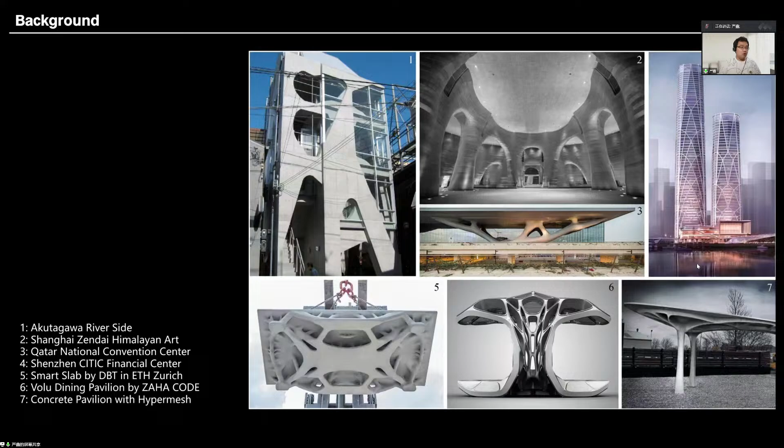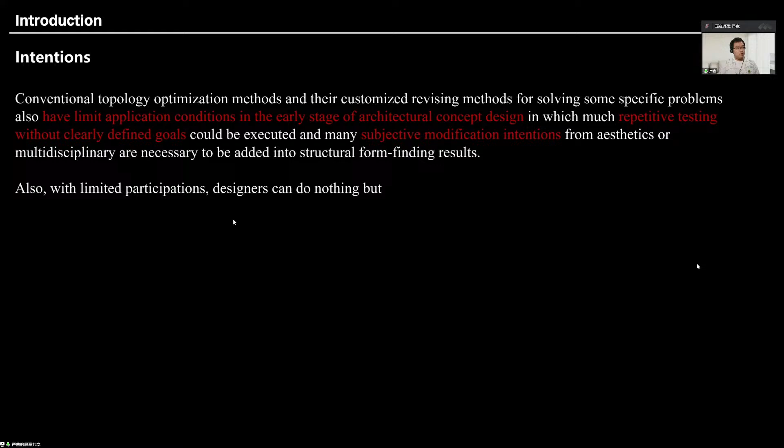But conventional topology optimization has its own problems. It has limited application conditions in the early stage of architecture concept design, because as designers, when we design our own work, we need to compare our own design objectives with structural preference. This is very important for us, because if we just depend on the computer, and the computer tells us which one is good and which one is bad, that's not work of us. But when we use conventional topology optimization, we usually do something like this.

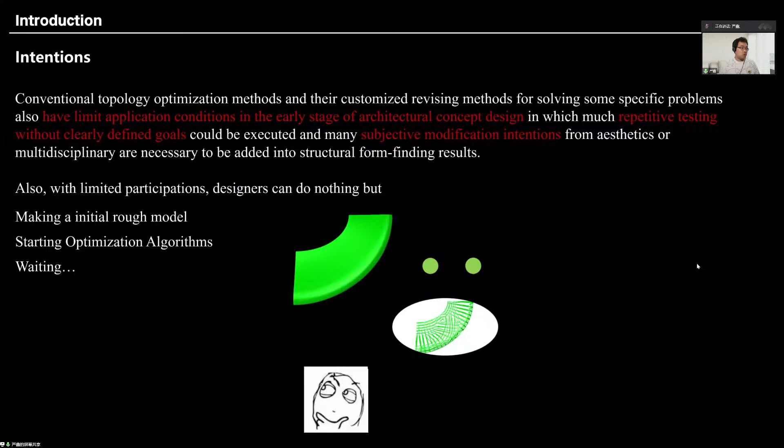First we make an initial model like the green one, and we can imagine what the outcome will be, what the final result will be. We want the final result to look like this one, some standard structural components with very small holes over the whole design domain. Then we start the optimization algorithm, and we have nothing to do but wait and wait. Finally the algorithm finishes its optimization, and we want to get a very good design, but the outcome is like this. We can see the final result the computer gives us is, it's hard to say, with the highest structural performance, but it's not what we want.

So the question is, can we pre-design the details before optimization, and how do we control the design features with topology optimization? This is the intention of my work. To achieve these goals, first I construct a framework, a BESO framework oriented to architecture design.

In the conventional BESO logic, we just write Python code and run it in the Python environment, with nothing to choose. In my work, I divided the whole logic into several parts.

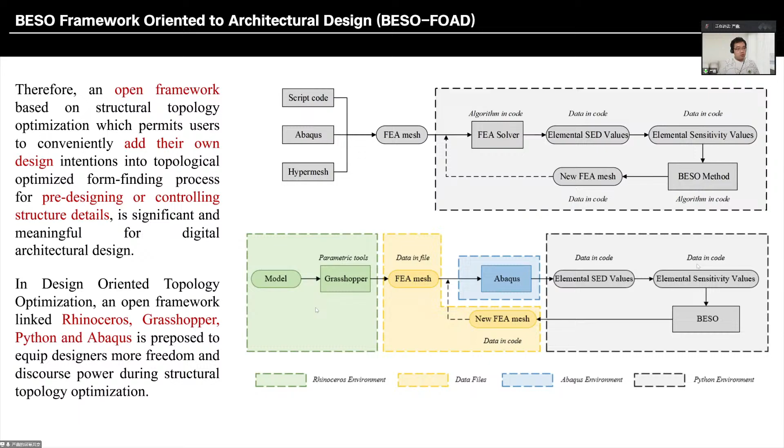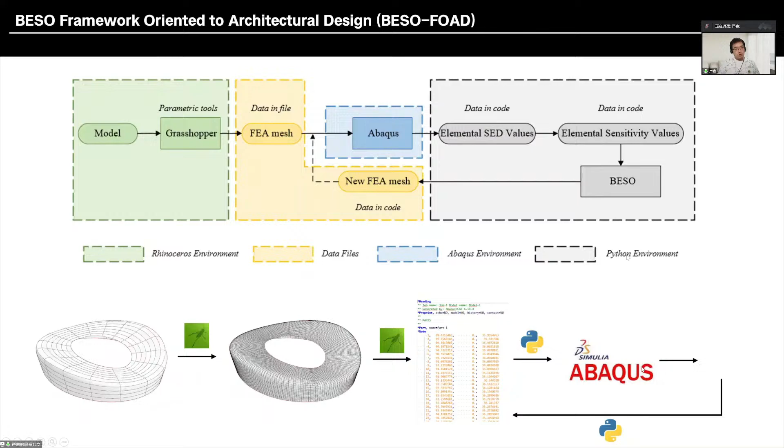With this framework, we can easily generate a very beautiful initial design domain with a free-form surface or with very complex forms. Then we can use Grasshopper to generate its calculation network, and we can get all the information about the FEA elements we need, then transfer that information into the TSC files and transfer the values into the BESO loop.

So with this framework, we designed and fabricated some installations like XForm 1 with Dr. Nic Bao and Professor Mike Xie, and XForm 2 in 2019 at the Barcelona exhibition, also with Dr. Nic Bao and Professor Mike Xie.

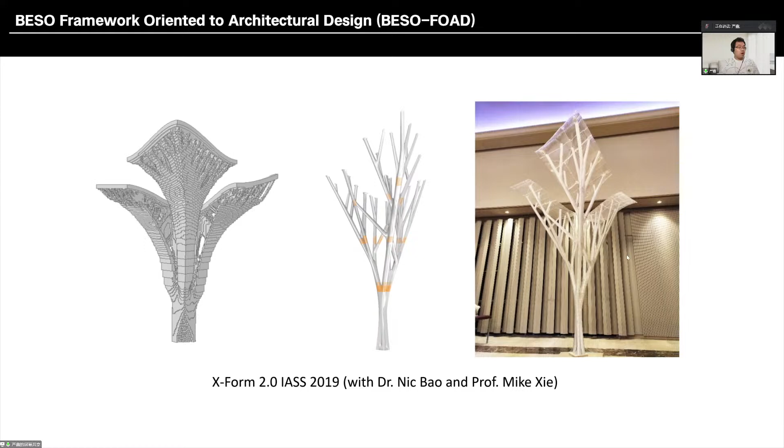And we also do some computation, which means structural computation, to generate the highest structural performance result. So this is the basic logic of the framework, but this also does not fit our goal about the pre-designed form details.

So I changed the framework with the right part, which is artificial coefficient files. This one just contains some parameters, and with this kind of parameters, we can change the basic BESO logic and add our design goals, our design preference, to the structural optimization.

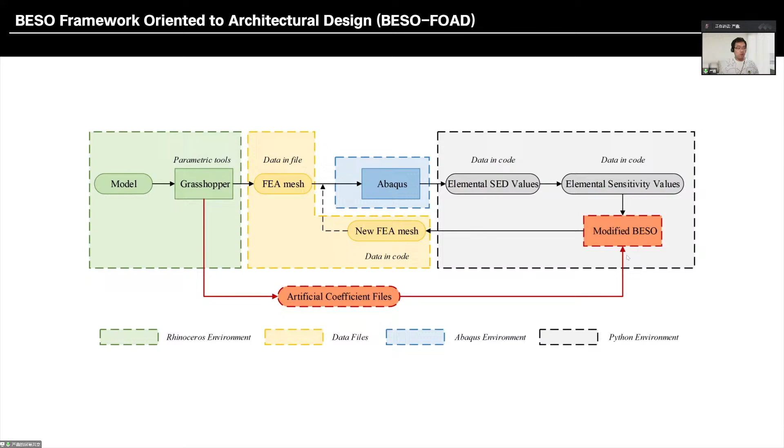So there are 6 new algorithms I developed in the past 2 years, and the first one is the original BESO logic. You can see the right part is the artificial coefficient files I made.

In this algorithm, I add some parameters into the topological optimization algorithm, and then integrate our design concepts with the structural calculation and mix them together to get another design, which at some level can fit our design goals.

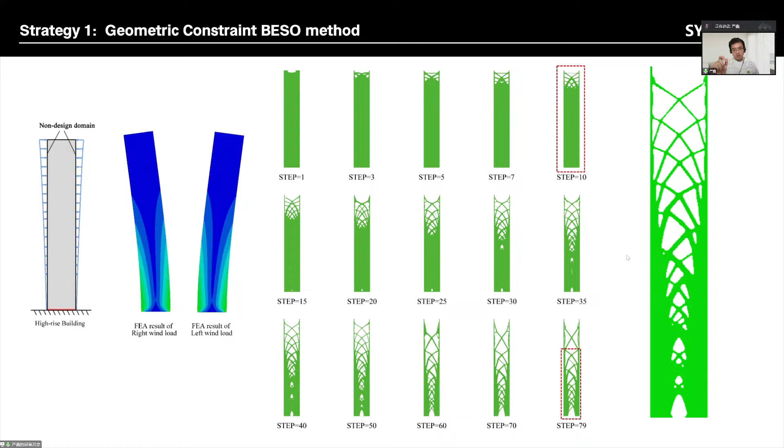So why do we get asymmetrical parts? The reason is one, because of calculation errors in the computer, and most importantly, when we reduce the materials, which means when we remove elements, the elements in symmetrical positions are not reduced at the same time. So when one element is reduced and the other one is still here, from that point the following results go asymmetrical.

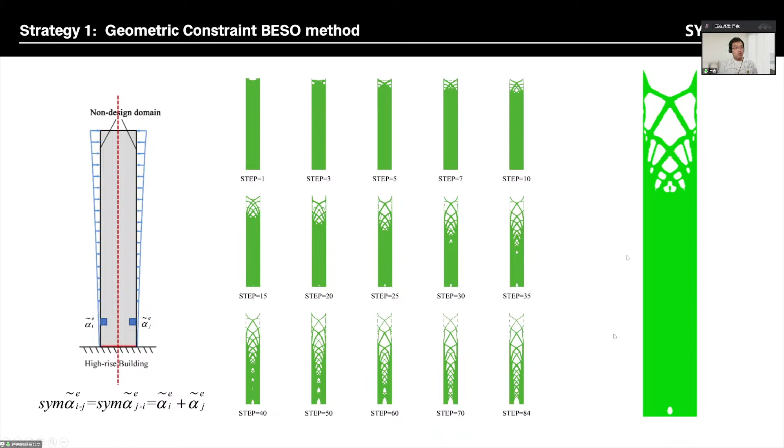So I made a SYM-BESO, which is a symmetrical modified BESO method. In this method, I couple the symmetrical elements and add their mechanical values together to generate a new value, which means a sensitivity number. Then based on the new sensitivity number, I can remove the symmetrical elements together. So in each step, we can get a symmetrical result. You can see with this algorithm, we can always generate the symmetrical result.

And the second one is with similar logic. When we optimize the periodic structure with the conventional BESO method, it's hard for us to generate a very regular outcome because there are so many elements in the periodic parts. So we need to calculate all the element values together and then remove them or preserve them at the same time. So with the CYC-BESO method, we can generate our results with periodic features.

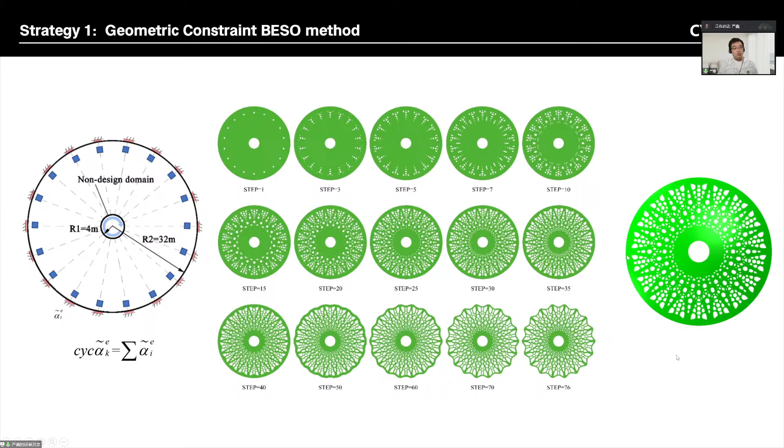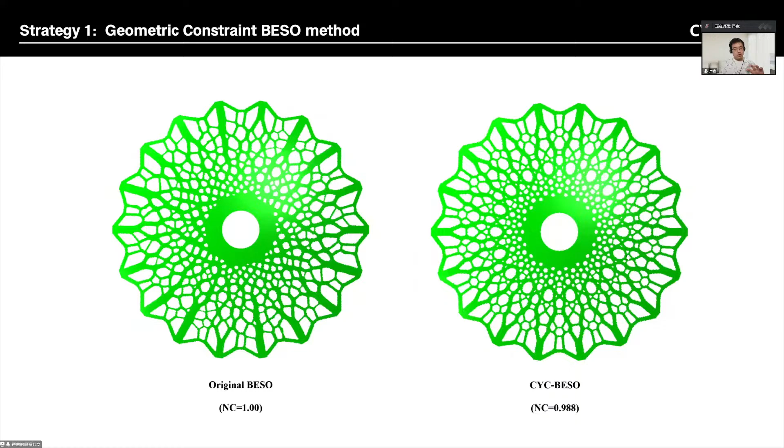So you can compare the outcomes. This one is generated by the original BESO, so you can see there are some non-periodic parts here. Then with the CYC-BESO, we can add the periodic constraint to the algorithm and generate a form with periodic features.

So in the middle of the evolutionary process, we can generate some small parts which have no supports around them. So in the next calculation, this small part will just fall down without any support. If this happens, all the FEA calculation will stop because there is a very big displacement.

So to solve this problem, we just need to remove the isolated part before the calculation starts. But the question is how we can find the small parts without any supports in the optimization algorithm. So we use the depth first search method to search for the isolated part. With the DFS method, we can select which one is the small part without any supports and remove them first, then transfer the remaining structure to the next calculation.

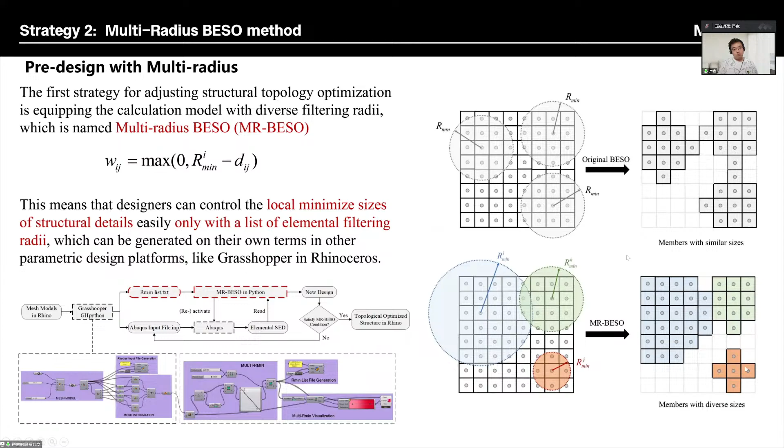But if we can encrypt different elements with different RMIN values, we can pre-design the local size in the final result, like the diagram here. So if this element is encrypted with a bigger RMIN value, and the right one is with a small RMIN value, then with the MR-BESO method we can generate a final structure with very huge blue parts and very small red parts. So with this kind of method, we can use the RMIN value to pre-design the final features in the optimized result.

So back to the 2D cantilever algorithm, if we add different RMIN values from 10.5 millimeters on the left part to 1.5 millimeters on the right part, we can generate a final result like this one. You can see with the very big RMIN value on the left, we can generate very huge structural components here, and with the small RMIN value on the right, we can generate some slender parts.

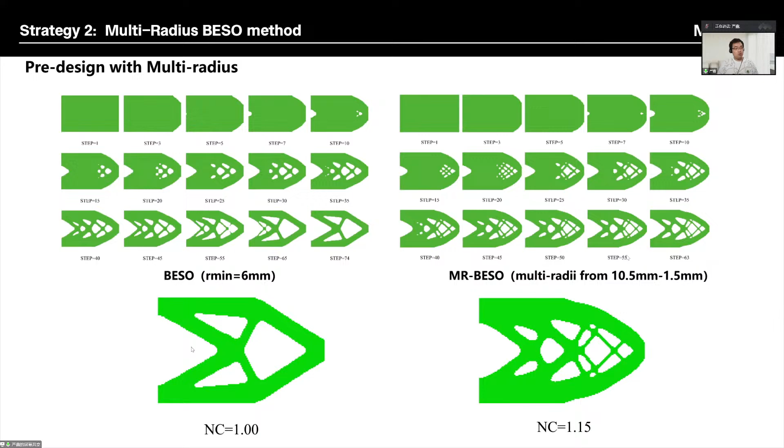This is generated by the original BESO method, so you can see the difference. Also, the high-rise building example can be generated like this one.

With the MR BSO method, we can set the bottom RMIN value about 15 meters, and the top one with 3 meters. So you can see the structural features from the bottom to the top go from huge to small.

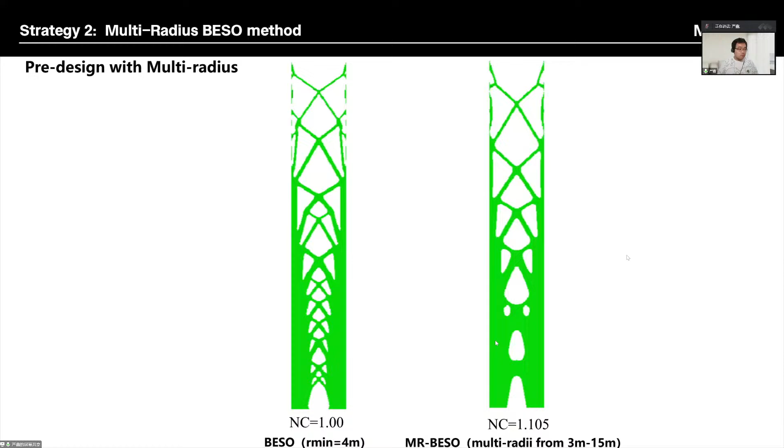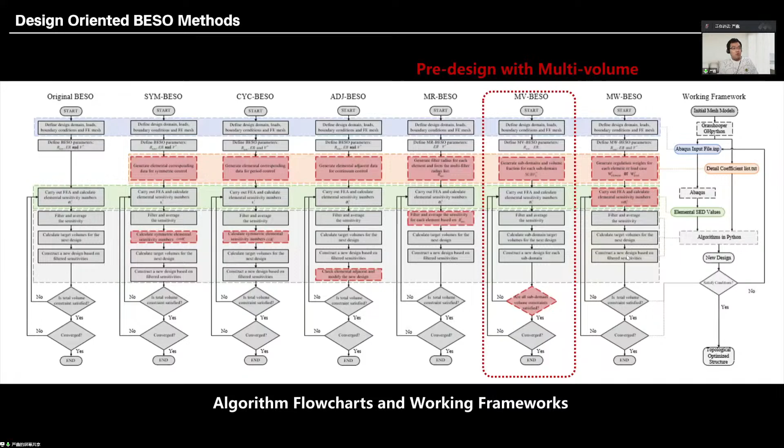And the third strategy is pre-design with multi-volume. In the original BESO method, we have only one volume fraction, which means if you set the volume fraction as 50%, it means you will remove 50% of elements away and hold half the materials in the final result.

But if you only have one volume fraction around the whole design domain, sometimes it will happen like this one. So when the original BESO method optimizes the whole design domain, some parts are totally void and some parts totally solid, because maybe the left part is more important for the structural performance, and the right part is not as important.

But for the architectural function, maybe sometimes we need some materials near the right part, and we also need to dig some holes near the left parts, like the blue one and red one. So with MV-BESO, we can add more local volume fractions into the different parts, and the algorithm can optimize at the same time, but reduce different materials in the local parts.

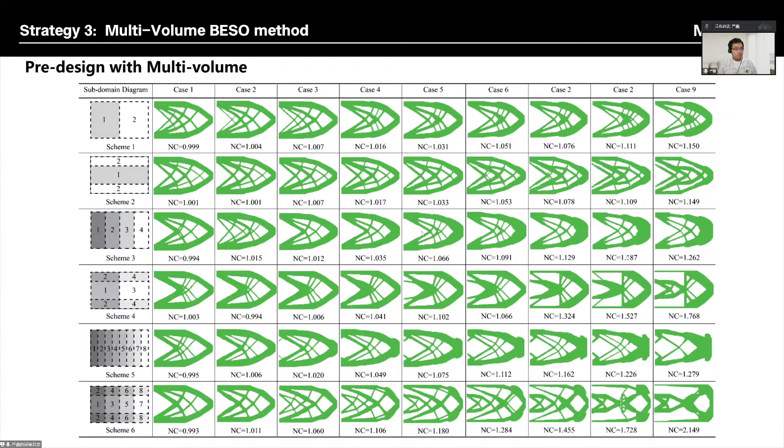We can control the local materials in the final result. This method is very important for high-rise building design, because in the original BESO method, we can only have one whole design domain, and we generate a structure with more materials at the bottom, and very small components on the top.

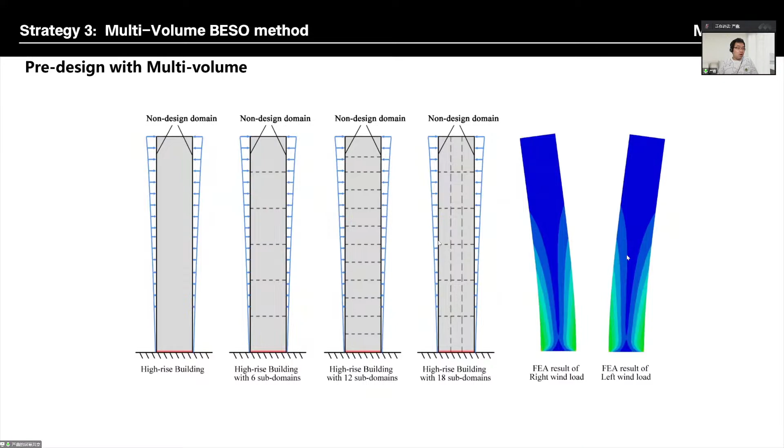So if we just divide the whole design domain into several parts, like 6 sub-design domains, or 12, or 18, we can generate different designs. With the sub-design domains, we can calculate their own volume fraction at the same time.

So we can dig some holes - this is a good example to compare the original BESO with the MV-BESO. With the original BESO, we can generate a final result like this one. But for the building design, the bottom part is very expensive for...

We must dig some holes as doors or windows to let people or light come in. But for structural performance, if you dig some holes at the bottom, it will have a very big effect on performance. So if we divide the whole design domain into 12 levels, we can make some bigger holes and add more windows at the bottom parts, while also having more structural materials on top.

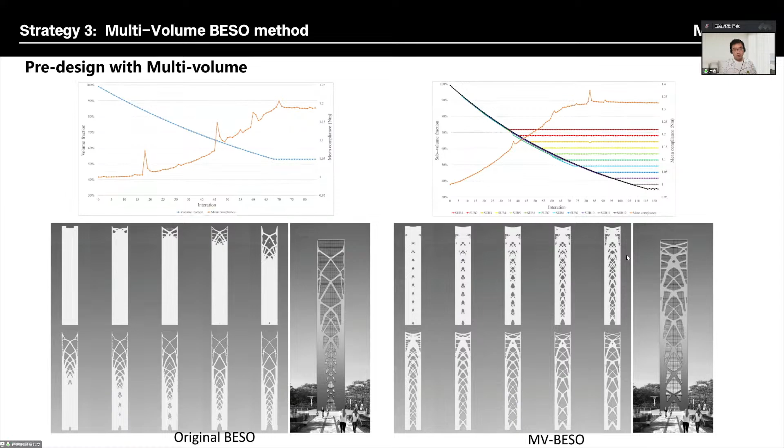That's what we want, because when we design a building, it's not only dependent on structural performance. We also need to consider other requirements - not structural requirements, but aesthetic or functional requirements.

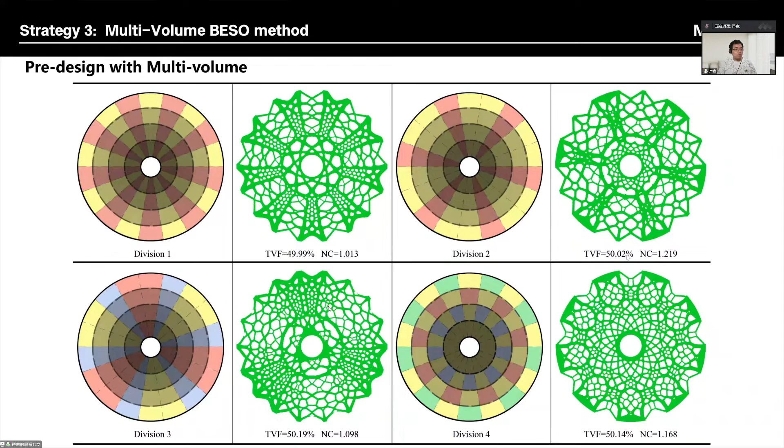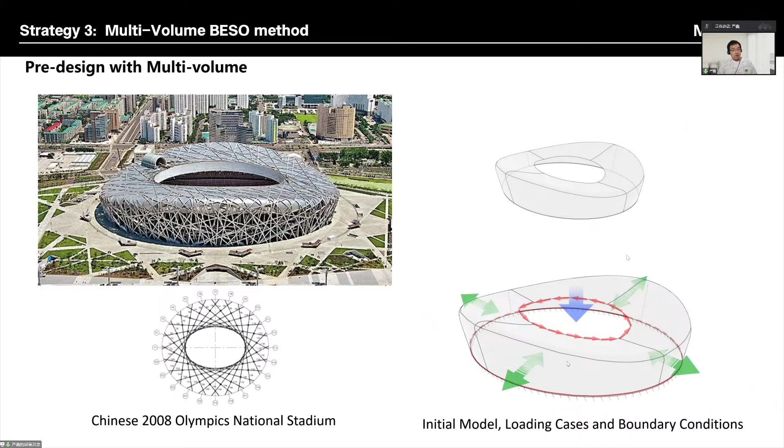This example is about the Olympic National Stadium. When we use the BESO method to generate it, the first one is the example we are familiar with - this is the original design of the bird nest, and level 2 is the design with the original BESO method.

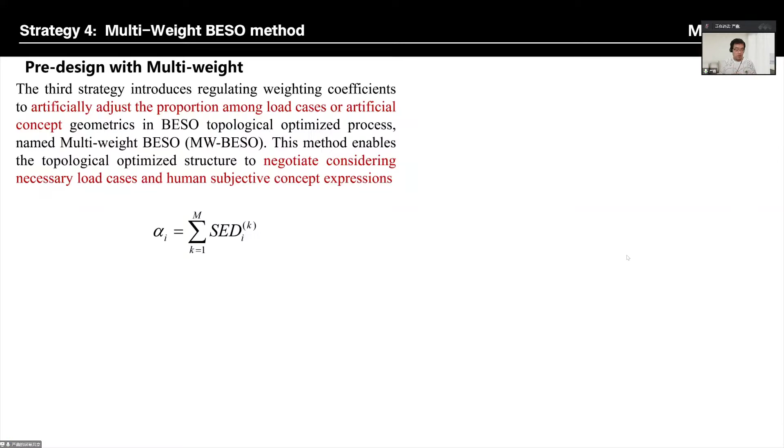In the BESO method, the very important value is the elemental mechanic value after FEA calculation. This value is the parameter for us to choose which element should be removed and which one should be retained. But this value in the original BESO just cares about the loading, the structural performance. If we want to add some drawing or diagram into the algorithm, we can add another value into the calculation of the sensitivity number, like this one.

So this one is about the structural loading, and this one is about the graphic parts, where a human adds some drawing to it. So the MW-BESO can compare these two pieces of information and mix them together to generate different designs.

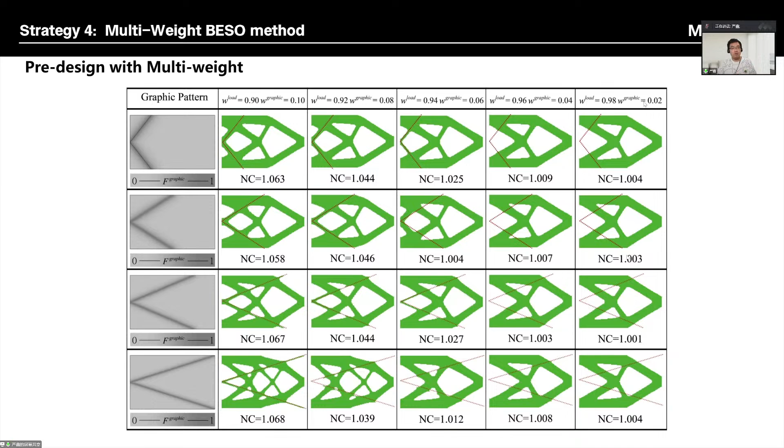So MW BESO equips you with choice. You can reduce the materials at any time, at any level. So if you have a big goal to have components here, you can add the weight of graphic to a bigger value. And if you just want to try whether the component is really unimportant for structural performance, you can accept it can be removed by setting the weight of graphic to a very small value. So with this kind of method, you can add some geometric features inside the final result.

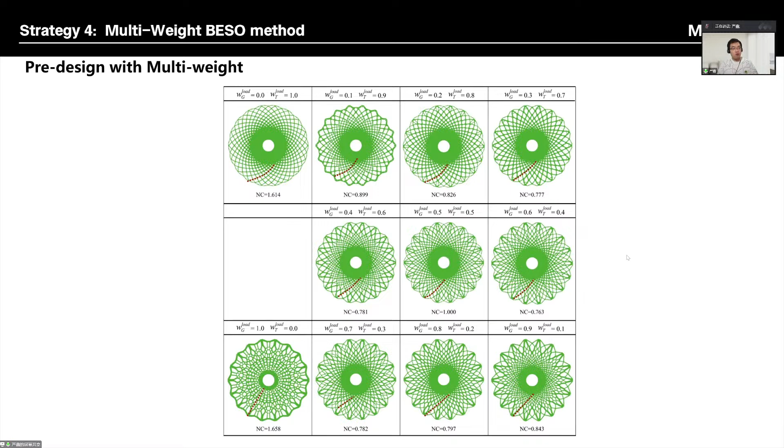Also, if you don't want to add graphic patterns, you can also add different weights about different loading cases. So for the dome design, the bottom left one is generated only with gravity loading, and the first one is only with torsion in the center. You can see totally different patterns. For the torsion in the center, it will generate curved parts like the red lines. If you just calculate with gravity, you will generate straight components from the boundary to the center. So if you change the weight of gravity or torsion, you can adjust the structure's local components from curved lines to straight lines.

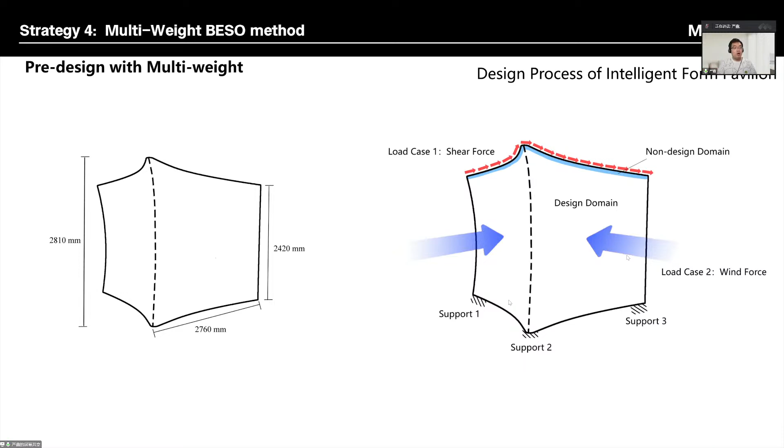So this is a real project designed with MW BESO in 2020 at Shanghai, in Tongji campus. When we designed this installation, we made an initial design domain like this. It's a wall, a concrete wall. We added a first load as shear force on the top, added two wind loads at two different surfaces, and fixed the three points.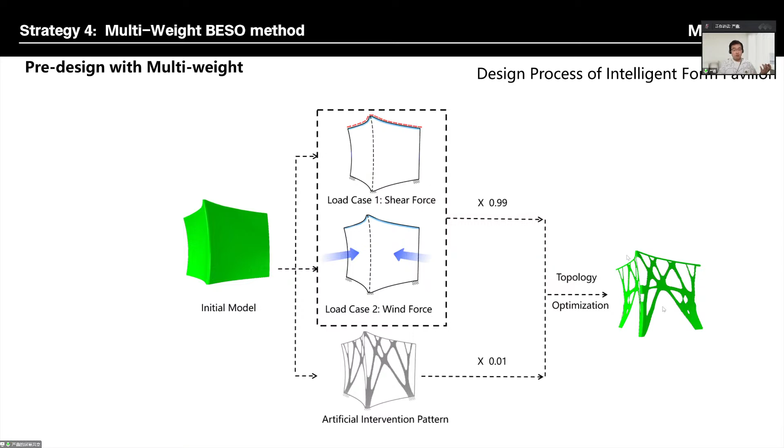So we used the 2D example to generate a 2D optimized pattern, and then transferred the pattern to the MW-BESO to generate the weight parameters, which is the artificial coefficient fields for the MW-BESO. Then we compared the information and mixed it together, setting the weight of the loading case to 99% and the artificial intervention pattern with a weight of only 1%. But the final result is totally different from the original BESO design. So with these settings and with MW-BESO, we can generate a design like this one.

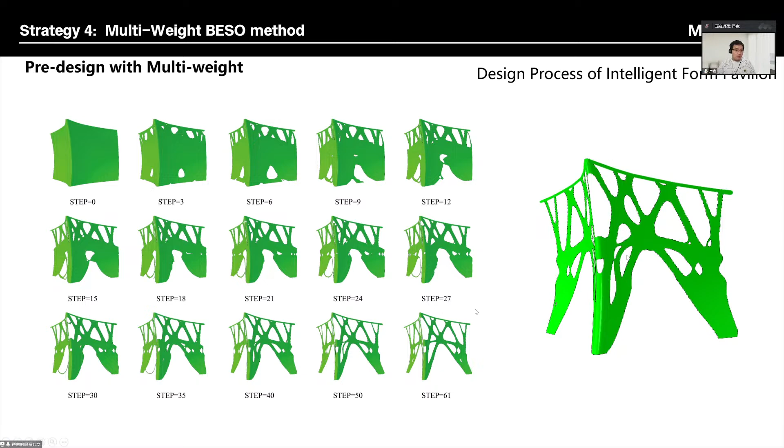It's totally different from the original BESO, right? If you compare the MW-BESO optimized result with the pattern we transferred, you can see the MW-BESO adds structure components in the middle to support the whole structure, encrypting the whole structure with higher structural performance. So this is the final installation in Tongji campus.

So that's the work of mine over the past 2 years, and that's all of my presentation today. Thank you.

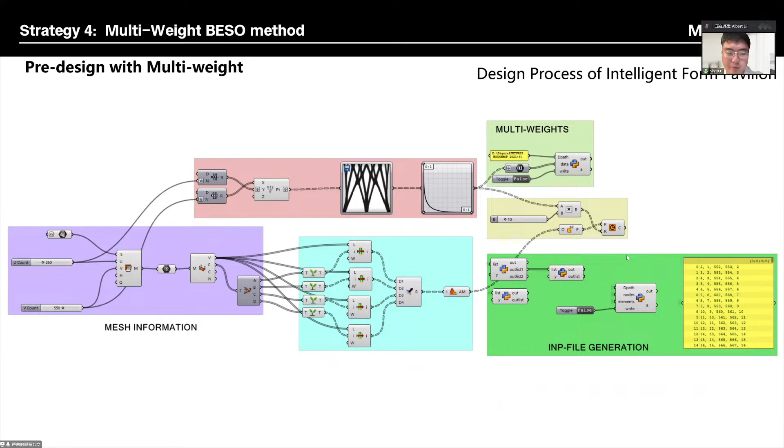I have a question for the MV-BESO, for your bird nest example. How's the performance loss when you use different resolution of subdomain?

In this presentation I didn't add the information about the value, the structure loads. So let me open my paper to give the information about the component, the structure loads.

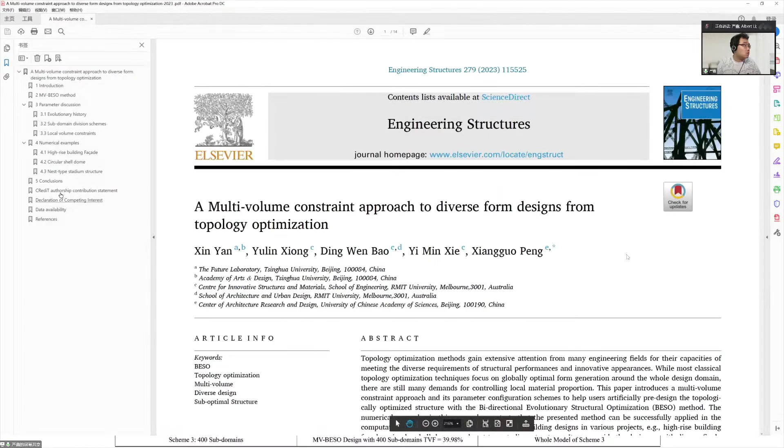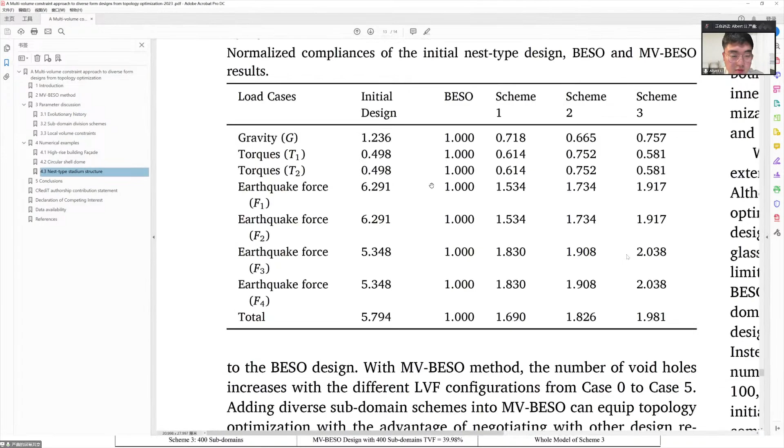This is the initial design, which is the real project, and this is the BESO results, and this is the design with 25 sub-design domain, 100 and 400. So with the different loading cases, we compare all the results with the BESO method.

You can see at the earthquake force, maybe the BESO method is the good one, the best one. Yeah, I understand.

For the torsion in the center, you can see the MV-BESO is the best one. And initial design is also good. But for the gravity, MV-BESO is also good compared to these two.

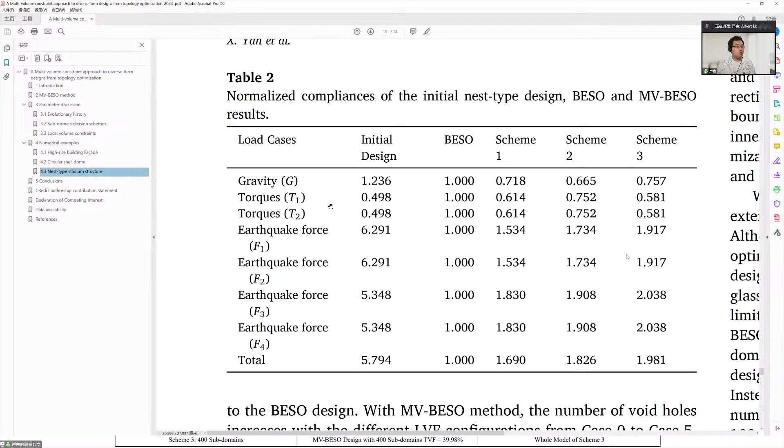So I think it depends on what you want to optimize, because in this example I just added all the load cases together to reduce the materials. So I think the MV-BESO can generate the structure with small holes, which is much better for the torsion in the center.

Okay, I understand, thank you for your answer. And I have another question: when you developed this algorithm, I remember you used Python.

But when I use Python, I noticed that only float numbers are allowed, not double. But when we use the BESO method, we have a design variable that needs a very small design exponent, I remember that.

But how do you use Python to support this very small number? Because it may exceed the limitation of float number. Actually, I haven't encountered the problem about the float limitation.

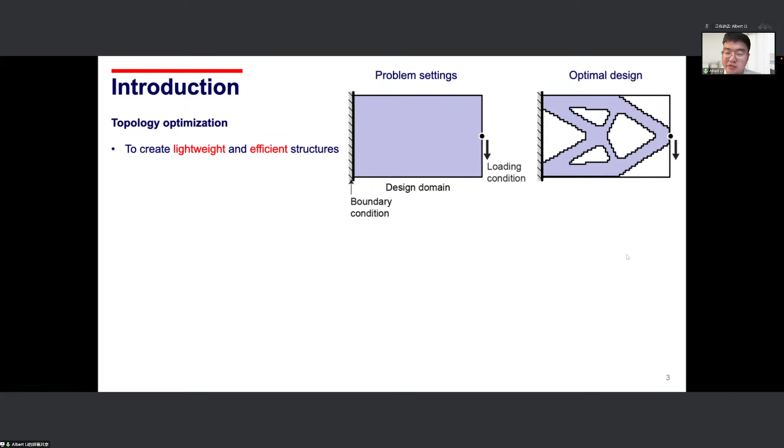Topology optimization is a generative design technique that can create lightweight and high-performance structures by distributing materials in a design domain. Conventional topology optimization methods rely on finite element analysis, which can calculate the local structure performance of discrete elements, as shown on the screen. Based on the quantified values, topology optimization can iteratively explore the most efficient structure form according to the input design domain, loading and boundary conditions, and volume constraint.

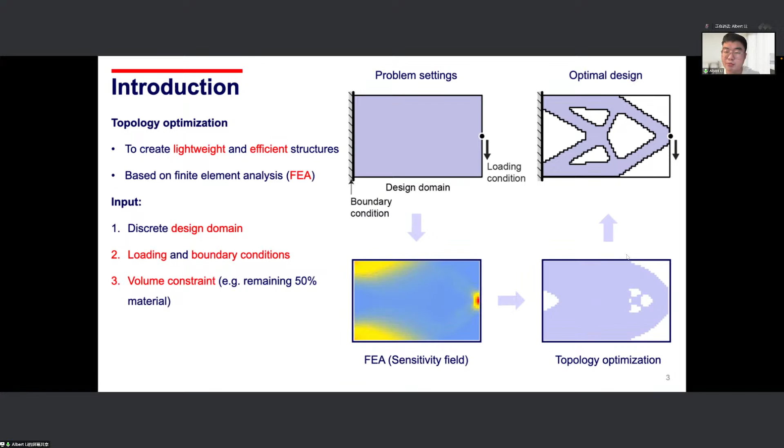Among many topology optimization methods, a widely used technique is the bidirectional evolutionary structural optimization method, the so-called BESO method, proposed by Professor Mike Xie and Professor Xiaodong Huang. This technique can add and remove finite elements simultaneously to improve material distribution.

In recent years, this technique has been used in various structural designs, including bridges, furniture, and architectural design, as shown on the screen. However, existing topology optimization techniques are purely based on structural performance, which means that the results cannot always satisfy all design requirements, such as personality, fabrication costs, and aesthetics.

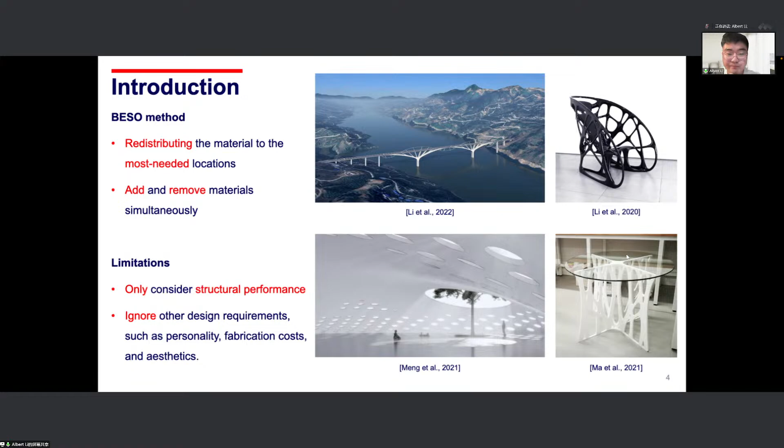To overcome this bottleneck, recent research has developed multi-solution strategies based on the BESO method. Such approaches sacrifice a small amount of structural performance in exchange for diverse design options. The obtained solutions have different shapes while maintaining a high level of structural efficiency.

The existing strategies can be achieved by introducing randomness to disturb the optimization process, changing the optimization settings, and adding structural complexity control.

However, although multi-solution strategies can provide many design options, finding the desired design is a difficult task. One reason is that evaluating each design option is time-consuming. Another reason is that fewer solutions can satisfy design requirements according to differences in personality. Therefore, too many design options can lead to a high cost in selecting a satisfying design. This is called the overchoice problem.

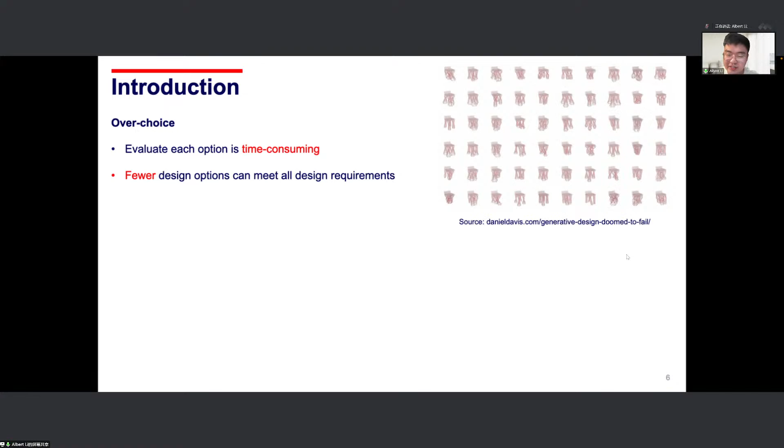So, what is a good design process? Design exploration is an evolutionary process rather than choosing an appropriate outcome from various options. Designers should add their subjective considerations to guide the design process. As a result, the optimization process should allow more subjective involvement.

It should be noticed that different design tasks require different levels of subjective involvement, where low and high levels of involvement can result in performance-driven and preferences-driven design, respectively. Performance-driven design doesn't need too much subjective involvement. Hence, they are suitable for applications where structural performance is important, such as bridge design and mechanical design.

Although such designs can create high-performance configurations, designers typically fail to add their creative ideas to affect the final outcomes, meaning designers have to passively accept the optimal solution.

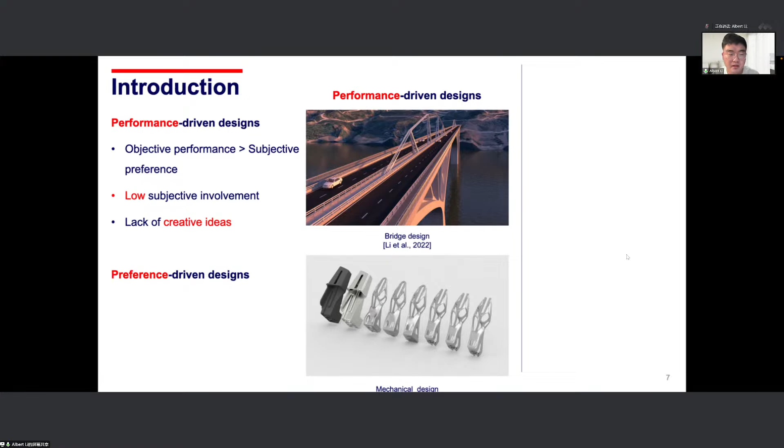On the other hand, preferences-driven design focuses on creativity and aesthetics, and is less concerned about objective performance. Thus, the key geometric feature of the final design can be fully controlled by subjective preferences, like furniture design and jewelry design. So the optimization process is utilized as a supporting role in design exploration.

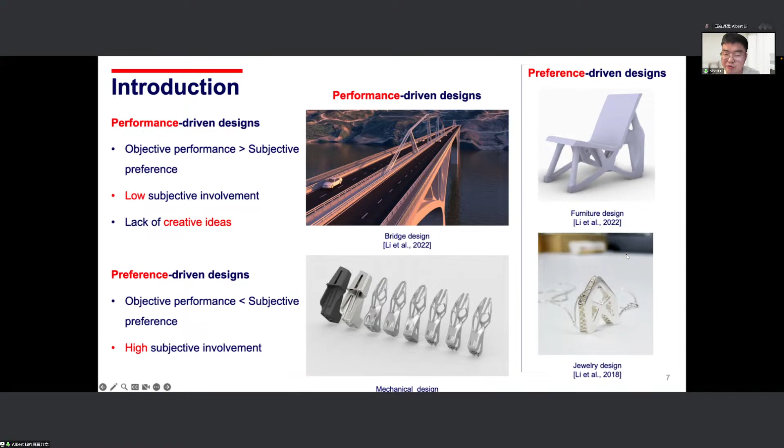However, few studies have focused on topology optimization based on subjective preferences, which is an ongoing challenge and remains underexplored. To solve the above issue, our research proposed a new topology optimization method considering subjective preferences, named SP-BESO. It is based on the BESO method. Let's look at how this method works.

The stiffness maximization problem subjected to a volume constraint can be formulated as shown on the screen. Among many steps in the BESO framework, an important part is sensitivity analysis, which can rank the elements according to the results of finite element analysis. The ranked elements can be optimized using the bisection method to create the optimal design.

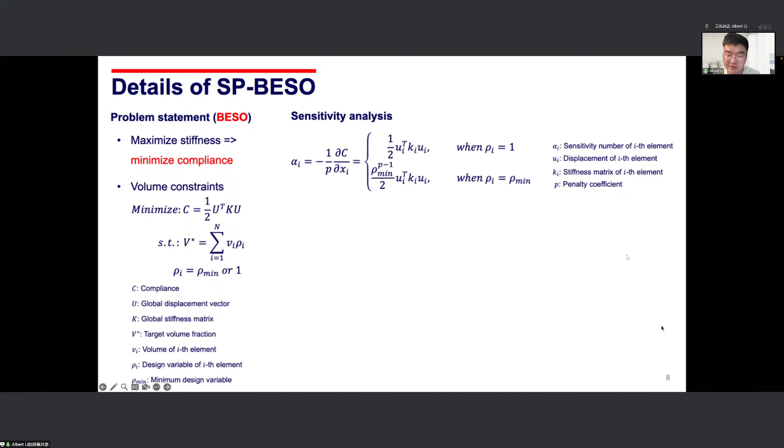In other words, the sensitivity field represents the consideration of structural performance and decides the formation of a final design. So, if we visualize the elemental sensitivity field with a texture, we can obtain a grayscale image, which will be useful in the following steps.

To generate multiple solutions, this study introduced the random perturbation method proposed by Yunzhen He. In their method, the sensitivity number alpha is penalized by a random coefficient beta, which affects the selection of elements being added or removed. Moreover, the generation of random coefficients is driven by the random seed integer gamma, where different gamma can result in different sets of random coefficients. Due to this, infinite solutions can be obtained by modifying gamma, thereby significantly improving the design diversity of topology optimization.

If we also visualize the random perturbation field with a texture, the multi-solution method can be understood as multiplying these two fields during sensitivity analysis.

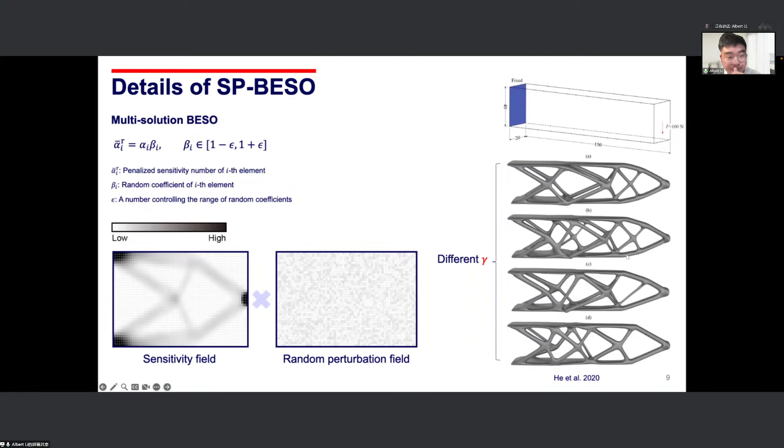Next, let's introduce subjective preferences. This study proposed a simple approach to quantify subjective preferences by scoring the existing solutions. The subjective scores are used as weights in topology optimization to generate new designs.

When S is smaller than 0, the parent design is considered an undesired solution. When S is larger than 0, the parent design becomes a preferred solution. Lambda s is a scoring parameter ranging from 0 to 1, which allows users to control the influence of scoring weights on topology optimization.

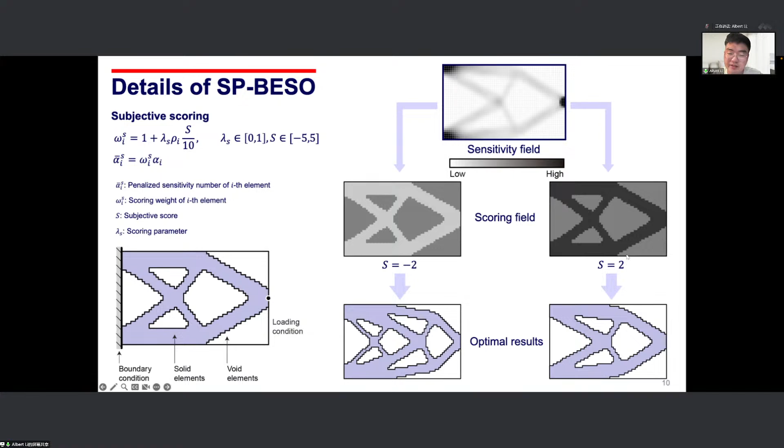Another strategy to consider subjective preferences is using hand-drawn patterns. Drawings allow designers to show their creative ideas. However, it is difficult for designers who lack structural design experience to produce high-performance sketches.

Due to this, we convert the given drawing pattern into drawing weights to modify the elemental sensitivity number. In doing so, these numbers can guide the optimization process to achieve satisfying designs.

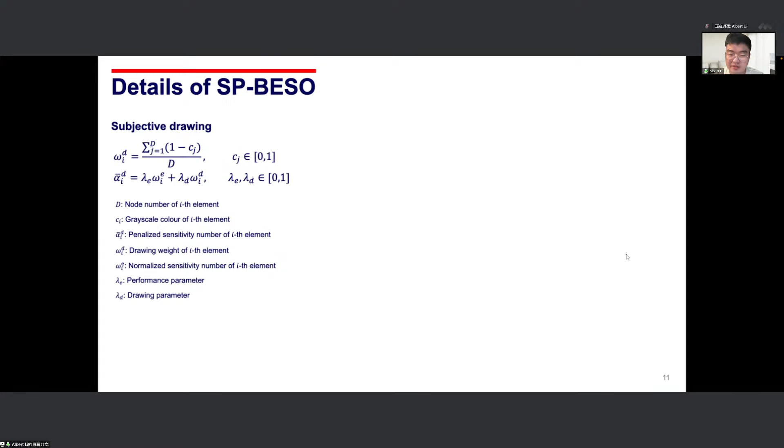In detail, a drawing pattern is first translated to a grayscale texture made up of pixels. The colors of pixels are used to calculate the drawing weight omega d. Then, the modified sensitivity number alpha d can be calculated by the equations shown on the screen. Note that controlling the two parameters lambda e and lambda d allow users to balance objective structural performance with subjective preferences according to design requirements. Finally, a new design integrated with the drawing pattern is created.

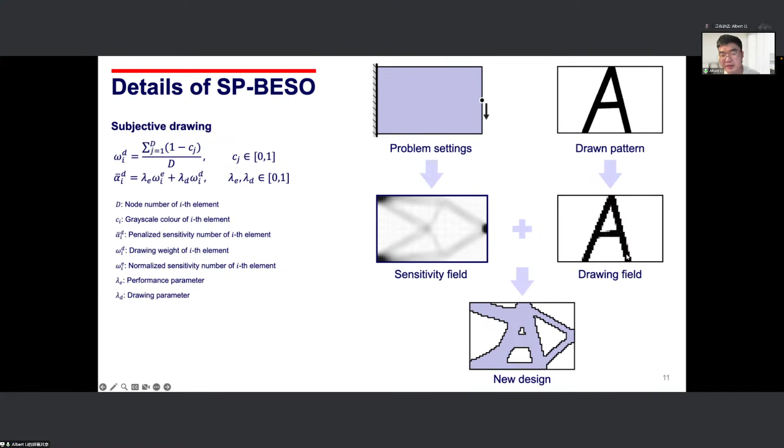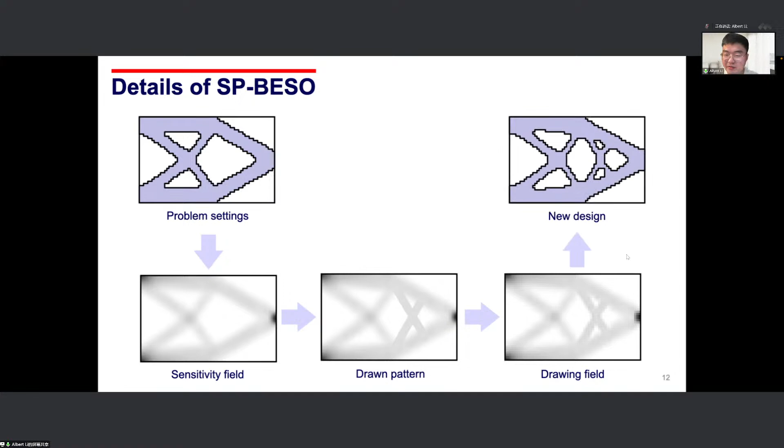Also, the drawing system can be based on the existing solution. First, the nodal sensitivity field of the existing design can be converted to a texture using the bilinear interpolation method. Next, users can draw or remove some structural members from the texture. The texture is then used to calculate the drawing weight for the subsequent topology optimization. Finally, a new design is created based on the updated drawing weight.

Now, let's sum up all techniques together. The SP-BESO method is proposed based on the combination of the multi-solution strategy, subjective scoring, and drawing systems. The integrated sensitivity number used in the SP-BESO is shown on the screen. From the field perspective, the updated sensitivity field equals the random perturbation field times the scoring field times the addition of the raw sensitivity field and the drawing field.

The computational workflow of the proposed method is summarized in the flowchart shown on the right. The new features are highlighted. As can be seen, by alternately inputting subjective preferences and executing topology optimization, users can iteratively explore the desired design. In this way, a human-centered design exploration is created.

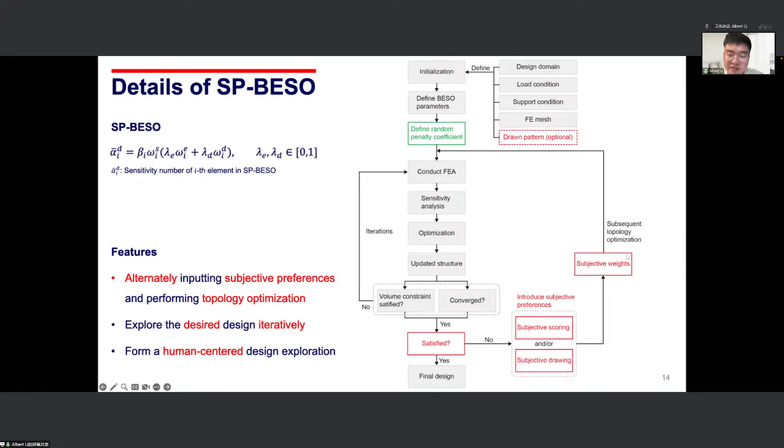To further explore the capability of the proposed SP-BESO method, a user-friendly digital design tool, IBSO, is developed. It has three unique systems: the multi-solution system, the scoring system, and the drawing system. The implementation of IBSO is achieved using both C++ and C# programming languages. The C++ part contributes an efficient optimization kernel, modified based on existing optimization code. The C# part gives the graphical user interface, allowing users to change parameters and define boundary conditions interactively.

The IBSO software can run 4 SP-BESO solvers simultaneously. This allows 4 parent designs to be parallel evaluated and further modified based on subjective preferences, resulting in child designs through subsequent topology optimization. The evaluation and modification process can be repeated until an ideal structural design is obtained.

Next, I will show the features of IBSO through a video.

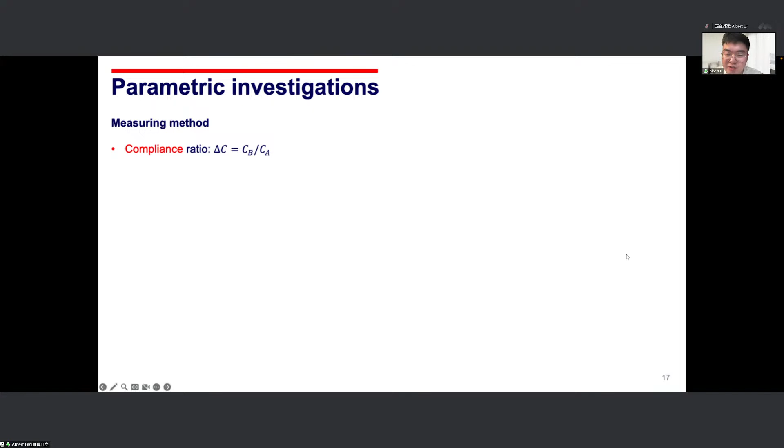In the following study, solution A and solution B are considered highly similar when delta C approximates 1, P approximates 1, and delta G approximates 0.

Let's look at a classic 2D short cantilever example. The optimization settings are shown on the screen. In the parametric investigations, we regard the original BESO result as the parent design.

Then we test the influence of scoring weights on optimization results by changing the subjective score S and the scoring parameter lambda S. All the tests are based on the same parent design with lambda S equals to 0.1, 0.5, and 1, and S equals to -3, -1, 1, and 3. Therefore, 12 child designs are created.

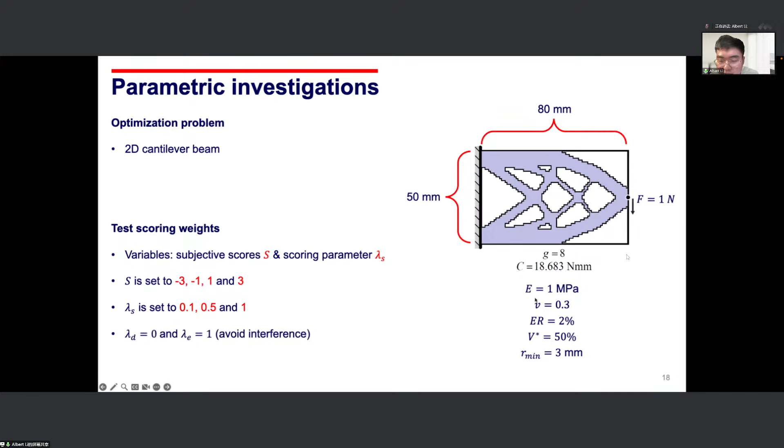They are then compared with their parent design using the proposed metrics. To avoid interference with the drawing system, lambda D and lambda E are set to 0 and 1 respectively.

Besides, most delta G are not zero, meaning the child designs are different from their parents. Together, this result indicates that the disliked score can result in diverse solutions.

Moreover, either high or low lambda s can make the child design close to the parent design because they have already been the preferred solutions. It indicated that the preferred score can result in similar designs to the parent design.

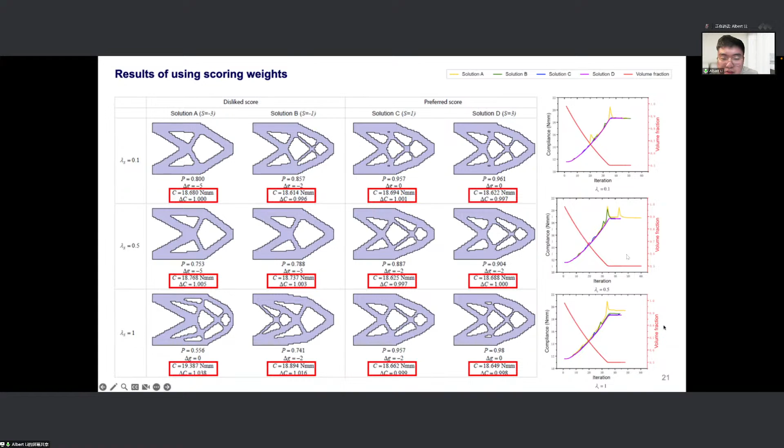Together, it can be concluded that both lambda s and s can control the formation of final topologies.

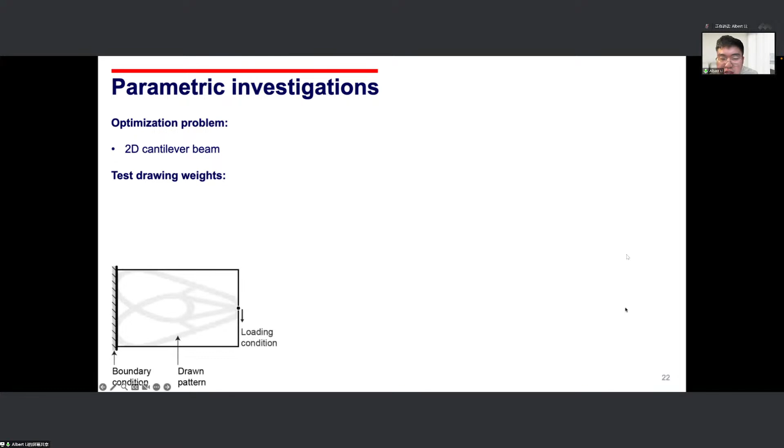In the following investigations, we test the influence of drawing weights using 5 child designs. The drawing pattern is a creative sketch as shown on the screen. The 5 child designs are created using different combinations of lambda d and lambda e, which can be further represented by delta lambda. The parameter settings are listed on the screen.

If we set a low delta lambda, the child design will tend to be similar to reference 1. But if we set a high delta lambda, the child designs tend to be similar to reference 2. This indicated that delta lambda plays an important role in determining whether the child designs are performance-driven or preferences-driven.

It can be concluded that although performance loss may be unavoided using drawing weights, the child design has the potential to meet multiple design requirements and inspire designers.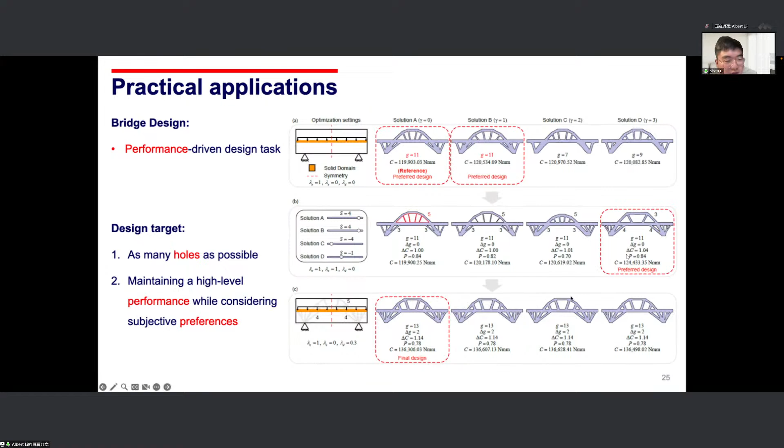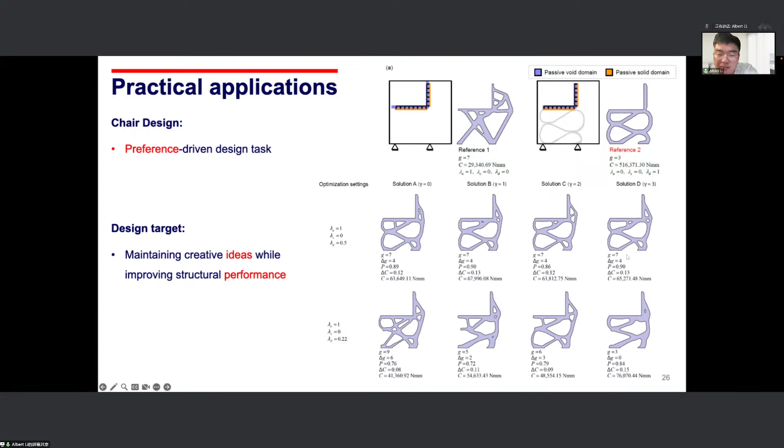Next, decreasing lambda D can further improve design diversity, as shown in the figure below, where the key geometric features are partly kept and their performance has significant improvement. This example clearly demonstrates that structural performance is not the only consideration in structural design. Creative ideas to improve aesthetic quality and achieve other design requirements are also valuable considerations.

In conclusion, the contributions of this study include: we proposed an interactive topology optimization method considering subjective preferences. The proposed method includes subjective scoring and drawing systems. Using the proposed method, diverse innovative designs can be created while maintaining a high level of structural efficiency. A digital design tool is developed to assist design exploration using multiple optimizers. Design parameters can control final topologies to be performance-driven or preferences-driven. The full paper has been published in Computer-Aided Design.

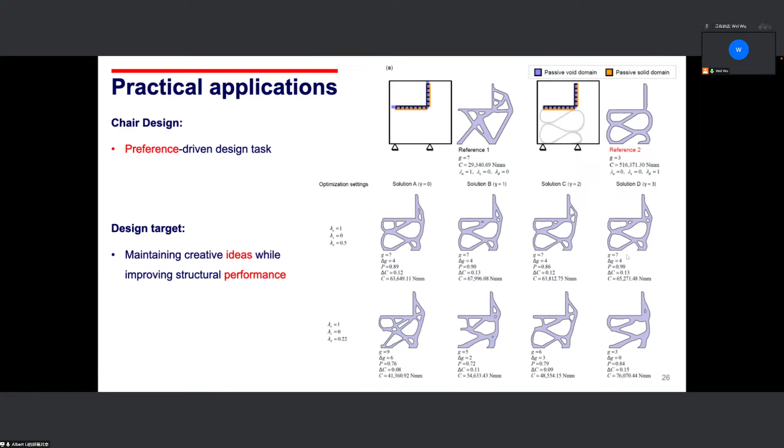I have two questions about the IBISO software. One is that, since you're actually drawing the solution—you make a drawing first or upload the image, and then you generate the results—can you upscale the results? For example, right now you have the radius or scale to change it; can you upscale it to a bigger image or bigger plan? And second, right now I see the analytical result is done in 2D. Is there a way, or a potential, to make it go from 2D results into 3D structural analytic results? Thanks.

Okay, thank you for your question, amazing question. I'll answer the first one first. I haven't implemented the upscale function in IB, because I think it is not a very complex function.

This is the publication stage—I just published a paper and software, so I haven't considered too much about user interaction and commercial applications. But in principle, that is very easy, because you can just apply different texture resolutions or something, using different textures to create different solutions, I guess.